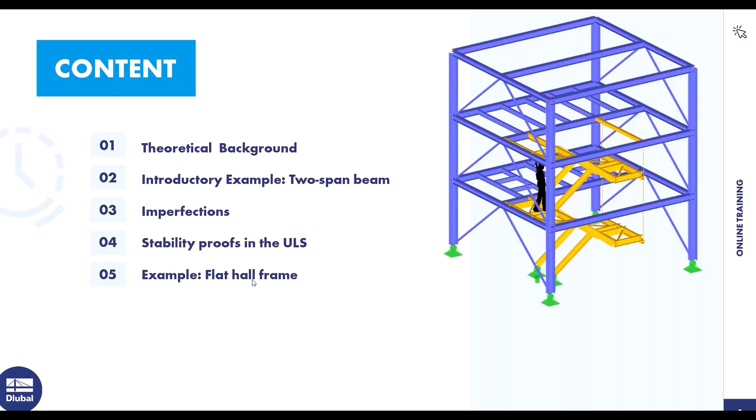That's the content today. At first, I say something about the theoretical background. Then we turn to an introductory example, a two-span beam. Then the next point is imperfections. Then stability proofs in the ultimate limit state. And then we turn to a second example, a flat hall frame.

At first, I say something about the products for the design according to EC3. The most important add-on is the steel design add-on. With that add-on, you can design steel members according to international standards like Eurocode, AISC, and so on. We calculate or design according to Eurocode today.

Then there's the add-on torsional warping. With that add-on, you can consider the 7th degree of freedom and the torsional warping. Then steel joints - with that add-on, you can analyze steel joints based on the finite element method. Then there's the cross-section program, RSECTION.

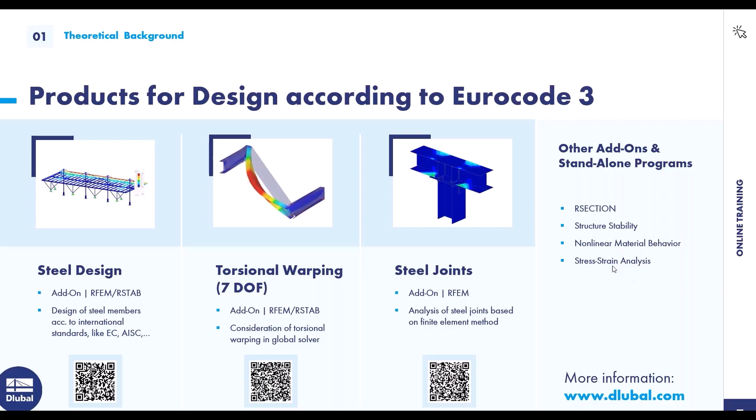Then the add-on structure stability. We use that add-on in the second example. Then there's the add-on nonlinear material behavior. You can, for example, consider a plastic design of steel plates and so on. And then there's the add-on stress strain analysis.

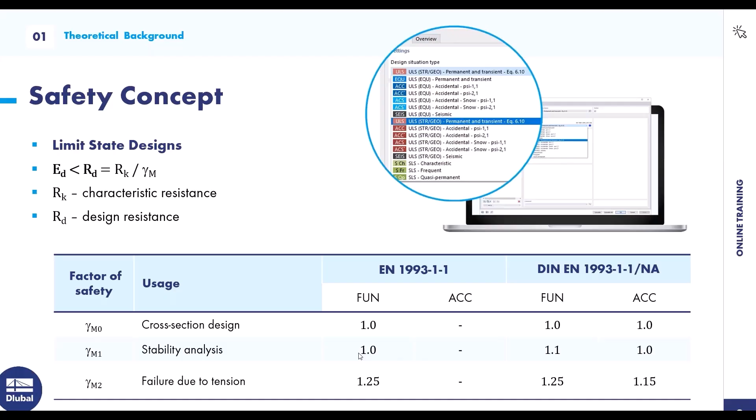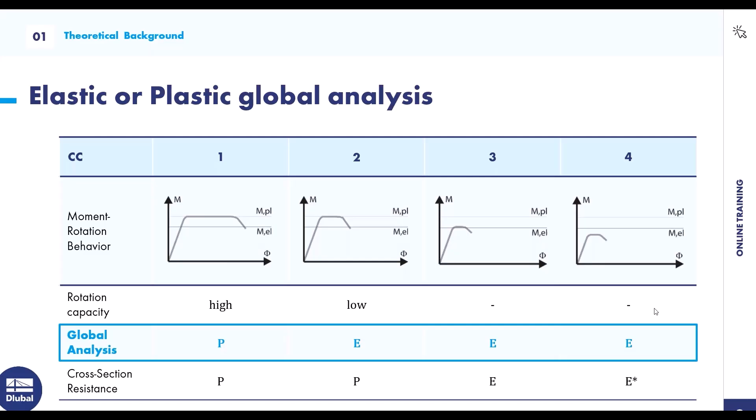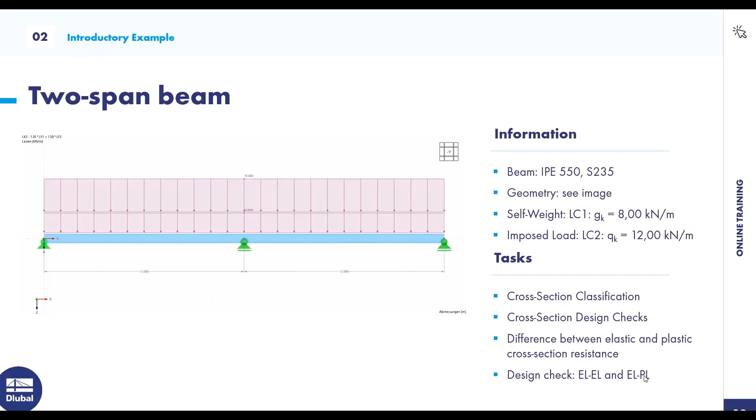Okay, I turn to RFEM. That's the second example, it's already prepared. But for the first example, I model the complete structure. File new.

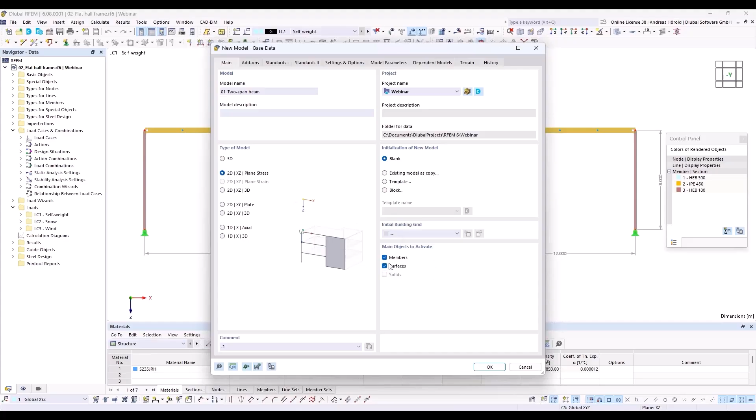So I enter 01_Two-span beam. Type of model 2D is sufficient. We consider only members, but you can also select surfaces, that doesn't matter. And we select the steel design add-on.

Then we need to select the standards. You can see there are, for the load case classification and the steel design, different international standards. We select the Eurocode, and for today we are in Germany, so we select the German National Annex.

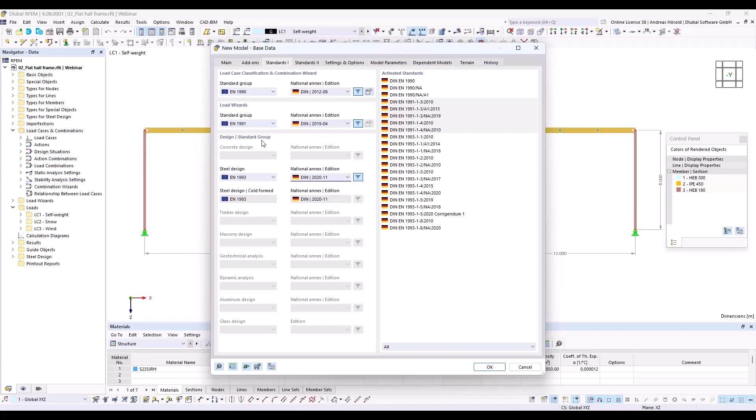We don't use the load wizards, but we use the load case classification and the steel design. We leave the dialog with OK.

So I turn to the view -y, move it a little bit. The grid is 1 meter. I leave that. If you want to change that, you can click on display grid at the bottom, right click, and then edit, and you can change the space for the grid points.

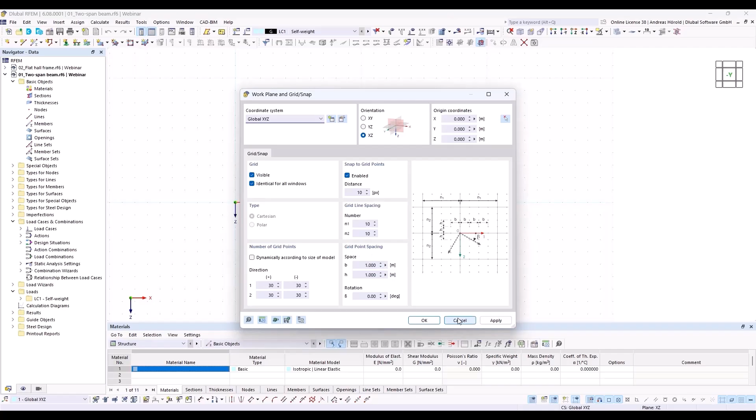So I start with the beam. Here, left above, new single member. I need to define a section. Create new section, I turn to the library.

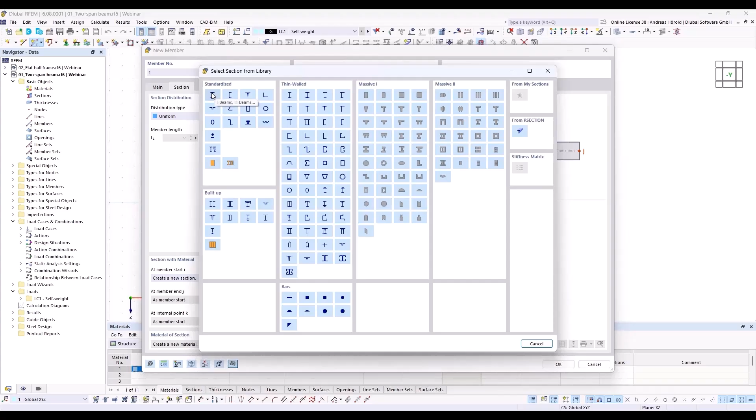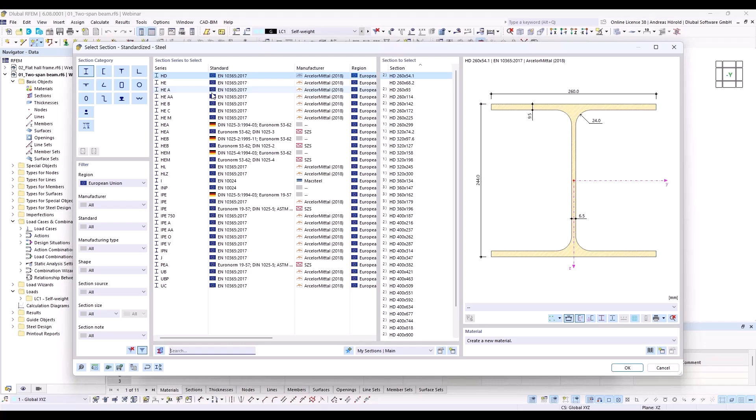Left above, an I-beam. If I am too quick for you, that doesn't matter, there is a recording. When you want to enter the structure by yourself, you can use the recording and the finished models. In the next days you will get an email with the recording, the models, and the PowerPoint slides. Just take a look at what I show.

That's sufficient. Okay, I select IPE 550, and right at the bottom I open the material library.

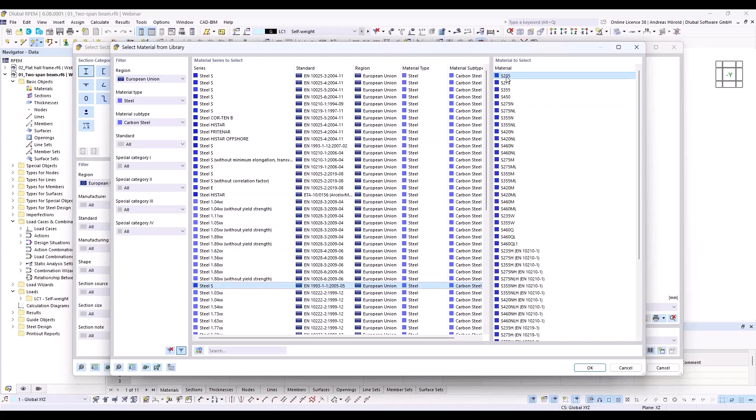I select European Union, steel, carbon steel. There are a lot of steel materials. I use the steel material S235. Okay, you can see now the color is blue, that's okay.

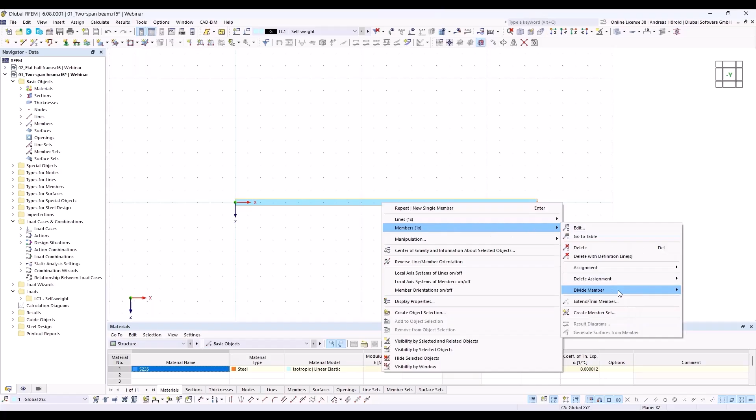So I create a member with a length of 24 meters and I divide the member in the middle with right click, members, divide member and intermediate nodes. One intermediate node, and I create that node without dividing the member. I select this option here, create member nodes without dividing member. Okay, there's the node.

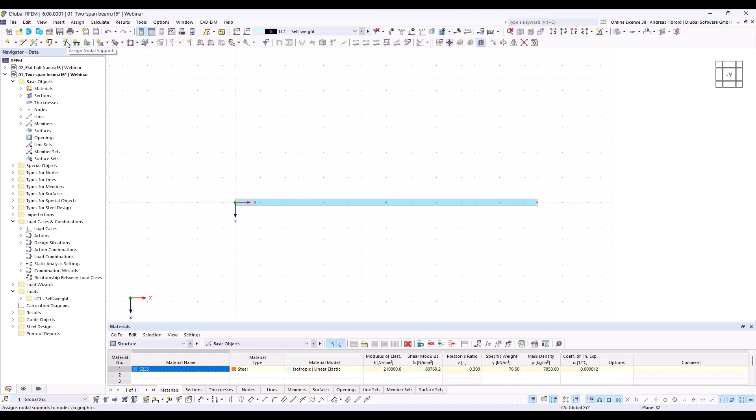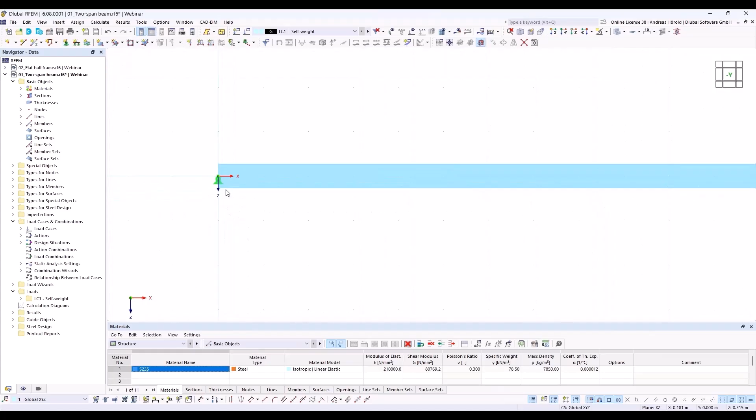So then I create the supports. Here left above, assign nodal support. I press the edit button to take a look if all is okay. Yes, we support in X direction and in Z direction. Okay, and this node is quite a little bit small. With a right click, I can increase the size of the support. Okay, that's enough.

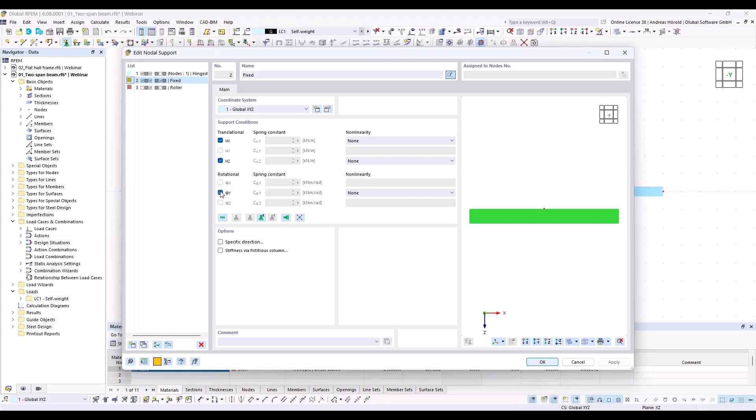So next support, I select the second support and press the edit button. We don't want to fix the rotation for the support, and we deselect the fixing in X direction. We only want to support the member in Z direction. Okay.

So that's all for the model. I create the loads. There's a self-weight load case. I select the edit active load case. The self-weight load case is automatically created for every model, and you can see also the self-weight of the structure is activated. That's correct in our case.

So, above, this button, new member load. And our load should be a force, uniform. You can see there are different options. And the load direction should be in Z direction, in this direction. So the load magnitude should be 8 kilonewton per meter.

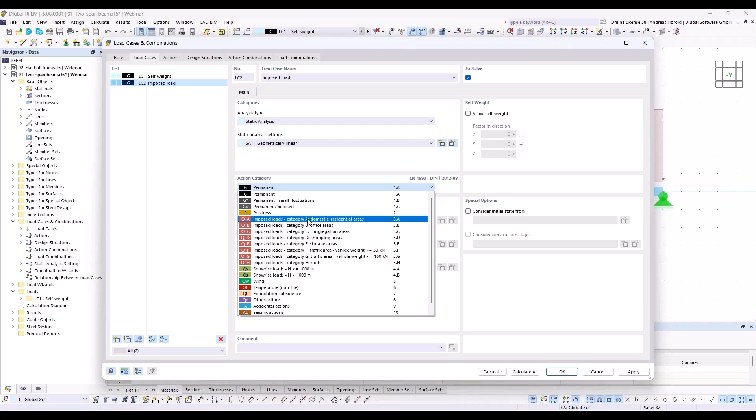Okay, then I create a new load case with that button. I call it imposed load. And I select the action category, not permanent, but imposed loads.

Then I have to create the load for this load case, new member load, and this time 12 kilonewton per meter. Okay, that's all for the model and for the loads.

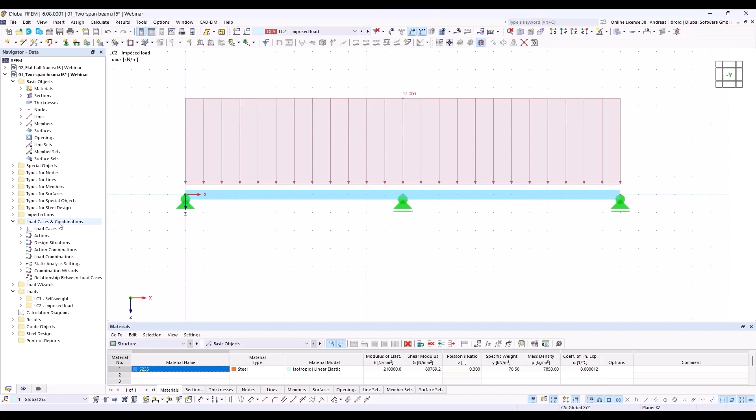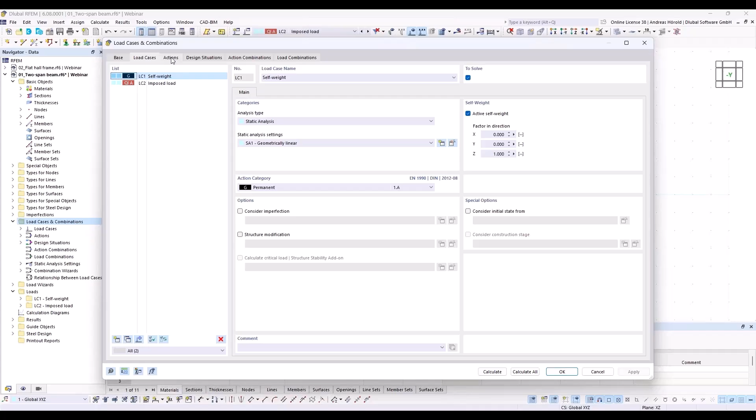I open the load cases and combinations dialog again, this time over the navigator data with a right click. Load cases and combinations, there are the base data. Now, at the beginning, we selected the standard group Eurocode and the German National Annex, and we activated the combination wizard. Those are my two load cases. We've got only two actions.

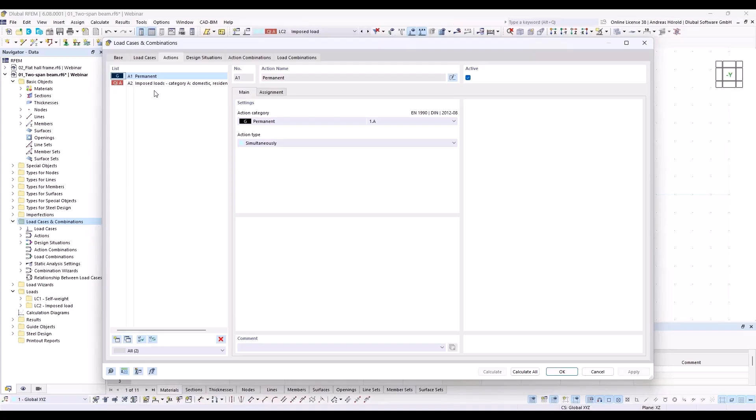Now that's quite important when you have, for example, 4 wind load cases - then there's only one action for the wind load cases. And you can combine in the load combinations either wind in -x or wind in +x and so on.

So then there are the design situations. We would like to design only according to ultimate limit state. That's why I delete the design situations for the serviceability limit state. And what's important, we need to activate the steel design.

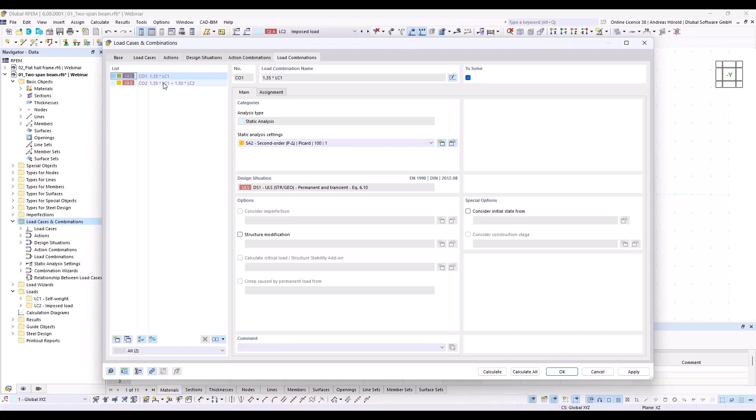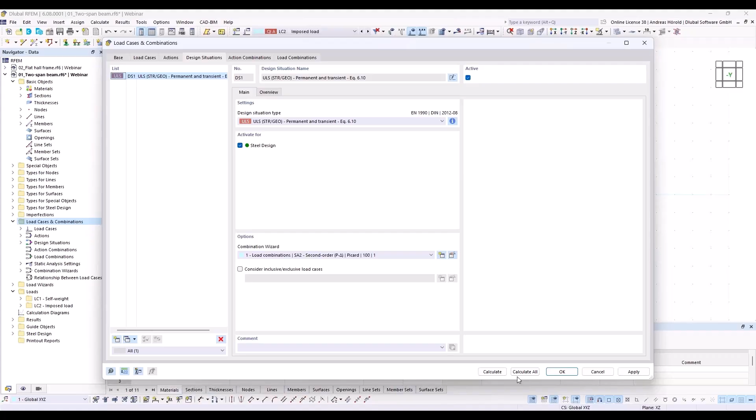So, there are only 2 load combinations. And if I turn back to the design situations and to the overview, these 2 load combinations are assigned for the design situation, ultimate limit state design. So then we can calculate also the steel design.

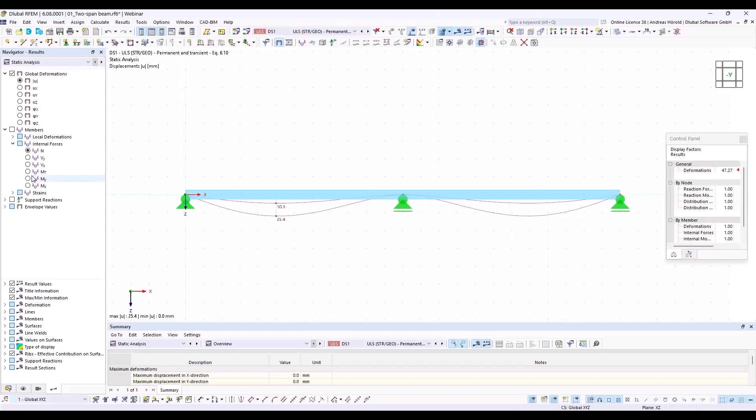At first, we take a look at the internal forces and the navigator results on the left side. The VZ, for example, I can also select only the maximum values, not minimum and maximum. So VZ and MY.

So, and then we can go to the table at the bottom and to the steel design. An error is displayed after the calculation. This is because we haven't made any steel design settings yet. We are only interested in the cross-section verification here.

Therefore, we change to the table design ratios and members. So there's the section proof for shear and for bending. And you can see a plastic design was done by the program.

So if I select the line and press this button, design check details, this dialog is opened. A detailed presentation of the proofs is now possible. You can see the equations and where you can find it in the standard.

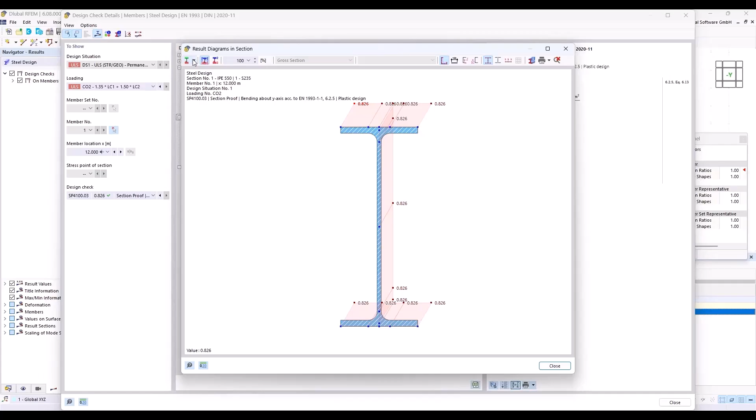So we can also take a look at the result diagram, the design ratio, the stresses. That's the stress in the middle, or over the middle support, and there's tension at the top and compression at the bottom of the cross section. So yeah, okay, that's all.

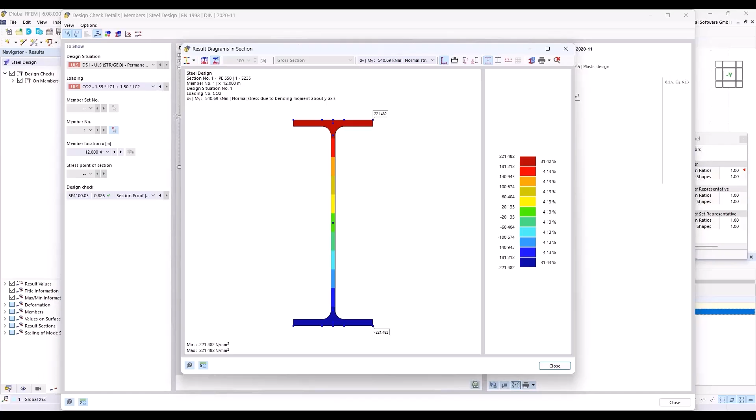Can I show also maybe the cross section information, the stress points, the different sub panels for the cross section classification, the C to T parts. Okay,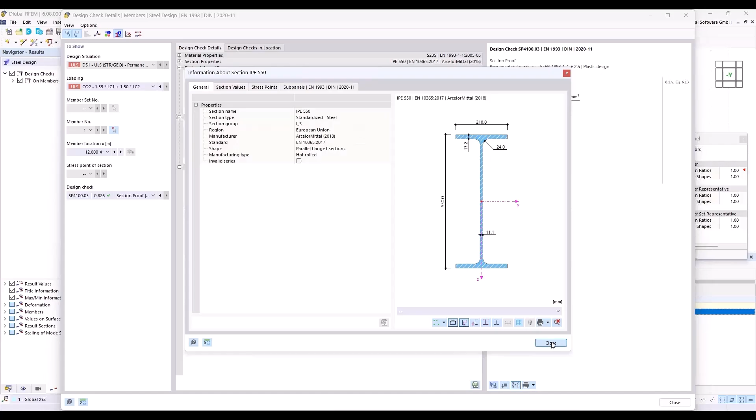That's all. Yeah, and the same, you can also, if you want to check the proof for the shear, you can either press that button or double click on the line, and you can see the equations from the standard.

Okay, now we don't want to do a plastic, but an elastic design. How to do that? I turn left at the bottom to the navigator data. Then I open the steel design folder and the ultimate configurations. And I double click on it.

Yeah, and then I can, for example, uncheck the stability design. Then this error message doesn't appear, but doesn't matter. I select that button here: elastic design also for class 1 and class 2 sections.

It's allowed to do a plastic design for class 1 and 2, but in this case, we would like to do an elastic design also for the cross-section class 1. In our case, the cross-section is cross-section class 1.

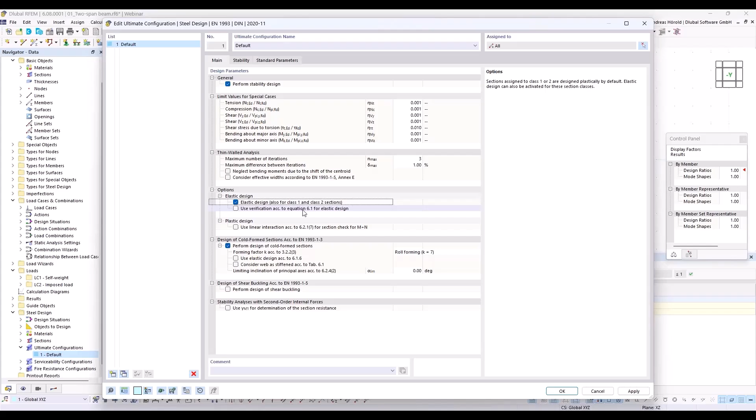Okay, we calculate or rerun the steel design again. And I select design ratios and members. I remember we had a design ratio for the plastic design of 83%, and now we have got 94%, because we do an elastic design. And if I double click on it, I can see the equation.

Okay, what you can hold in your mind is that we can do every time an elastic design. We can consider the elastic cross-section resistance. That's what we did in the second step, in that step here.

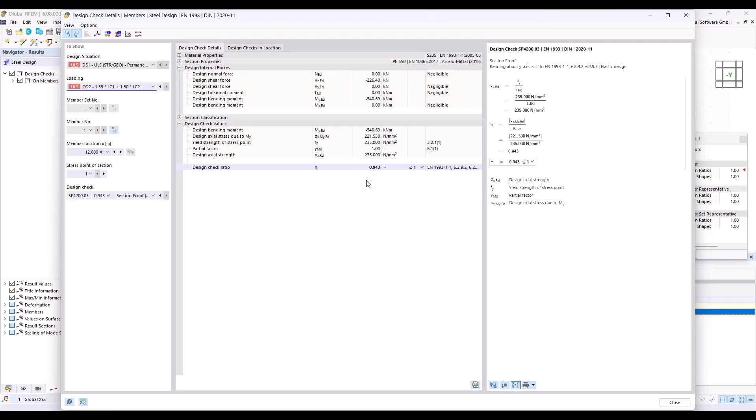So we have now learned how to carry out a cross-section check and how to take the elastic and plastic design into account. At first the plastic design, in the second step the elastic design, because elastic design is allowed for all cross sections. And in addition, we now know how to display the design formulas and compare them with our own manual calculation.

Then we turn to the next topic for today: effects of deformed geometry of the structure. In the first training course, Introduction to Member Design, it was learned how the results can differ between the calculation according to the first order theory, the geometrical linear analysis, and the second order theory.

The geometrical linear analysis is an equilibrium formation on the undeformed system, and the second order analysis is an equilibrium formation on the deformed system.

In this example of the cantilever column, this effect can be seen very well on the basis of a slender and a compact cross-section. In the case of the slender column, the increase in the bending moment at the foot point is much larger than in the case of the compact column, if one calculates according to the second order theory. And there's no difference when you apply the geometrical linear analysis.

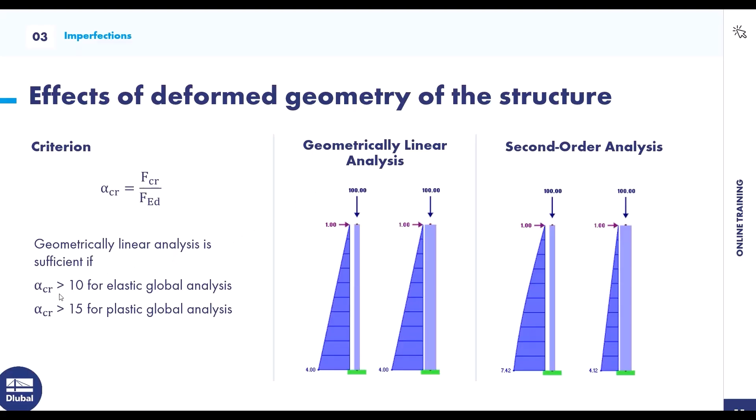So the next point is the equivalent geometric imperfections. Imperfections are closely related to this topic. In Eurocode 3, these are generally grouped together as equivalent geometric imperfections. What are imperfections anyway? They are production-related deviations in the model geometry and/or material properties. There can be real misalignments in classic hall constructions or tolerances in production, especially when rolled sections are used, and these can be summarized as equivalent geometric imperfections. On the left side of the graphic, you can see the initial sway, the global imperfection applied to the structure. If individual components are examined more closely, there's the local equivalent imperfection, for example an initial bow imperfection. This depends on the selected profile, the yield point, the buckling curves, and the proof method. These are two variants of the equivalent geometric imperfections.

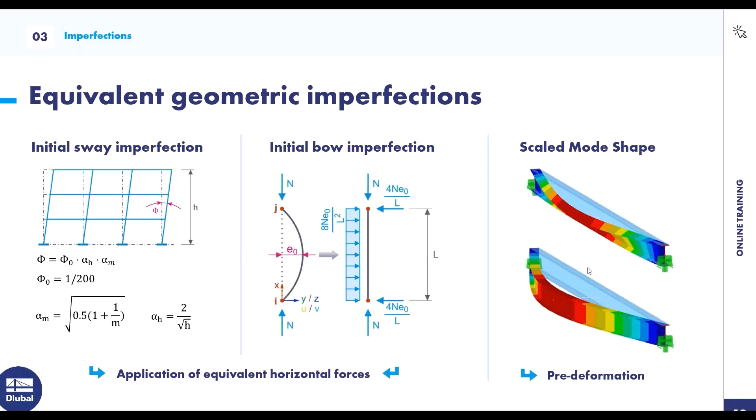Another alternative is pre-deformation, which can be calculated with the help of stability analysis. The respective governing eigenmode is scaled and applied as an imperfection. That's not so often used, but it's possible. What's often used is the initial sway imperfection or the initial bow imperfection, or both. You can see that in a later slide.

When designing steel in RFEM, 3 different stability analyses are carried out. On the left side, there's the classic flexural buckling as a lateral deflection. In the middle, you can see torsional buckling in pure torsion. On the right side, lateral torsional buckling as a combination of the two previous proofs.

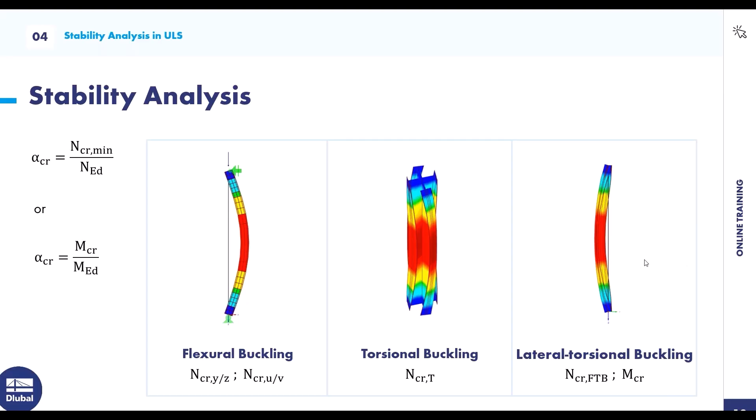Methods for stability analysis: there are 3 methods. Method A: you have to apply a global and local imperfection, and the structure analysis should be done with second order analysis. Then you can do the cross-section design checks with the internal forces. Method B: global imperfection, meaning only this initial sway imperfection, then the structure analysis according to second order analysis.

And what's quite important, you have to consider the buckling length by the member length, not with a factor—SK is equal to length. Then method C: structure analysis according to geometrical linear analysis on the ideal structure, but in that case with the real buckling length.

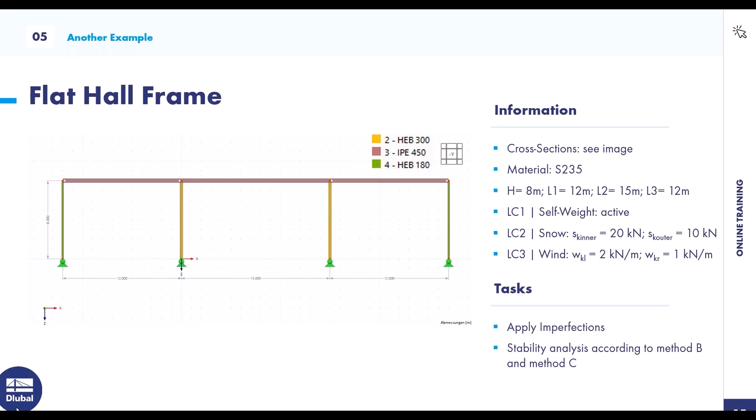Okay, so then I turn to the program, to the predefined example.

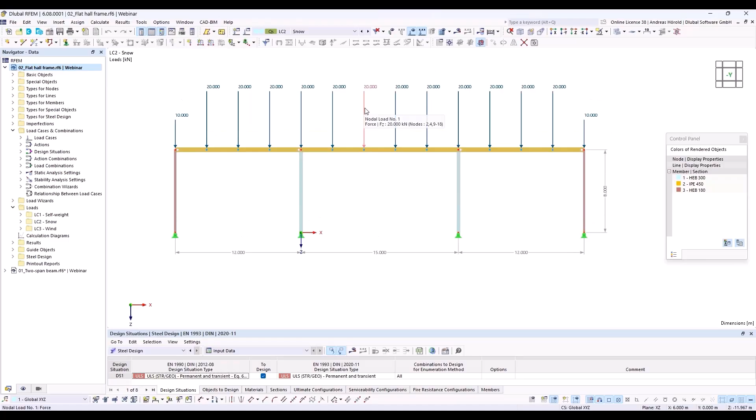So that's the construction self-weight load case, then a snow load case with loads, for example, from purlins, and a wind load case, wind in X direction with wind pressure and wind suction.

Left above, I turn to the base data, a 2D model, and we use the add-ons structure stability, and the steel design add-on. And we select the standards Eurocode and the German National Annex.

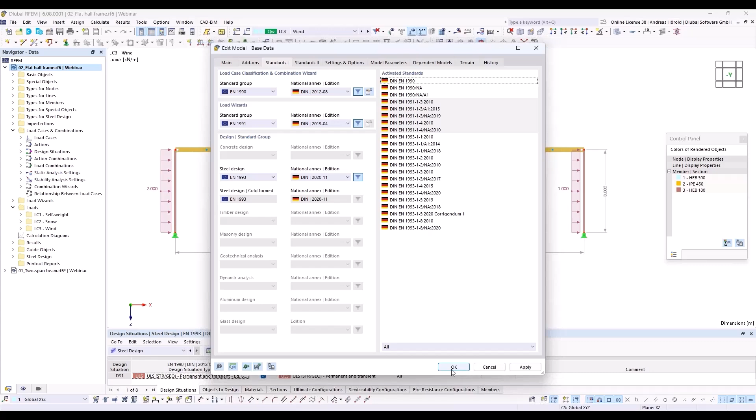Okay, and we use the add-on structure stability to check whether we are allowed to determine the internal forces according to the geometrical linear or second order analysis.

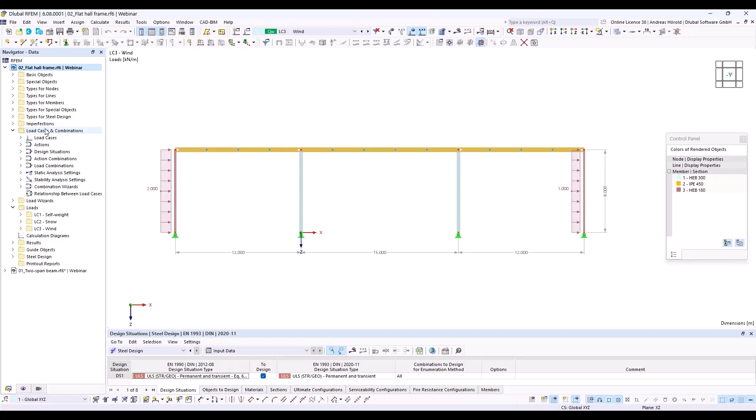That's why we turn to the load cases and combinations, and I go directly to the design situations. I select the geometrical linear analysis, and I edit that, and I activate the stability analysis.

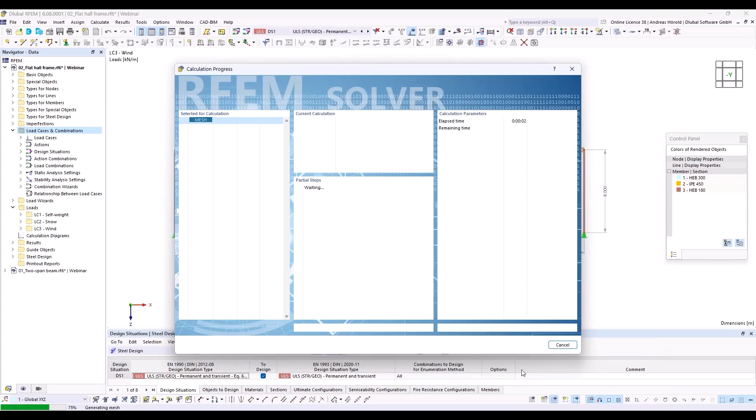Okay, and I run the calculation.

After the calculation, we see the minimum critical load factor, 6.05 for the design situation, and 6 is smaller than 10. We need to do a stability design by using the second order analysis.

For the stability design using the classic equivalent bar method, meaning method C, the internal forces can be calculated according to geometrical linear analysis, and buckling lengths must be assigned to the columns.

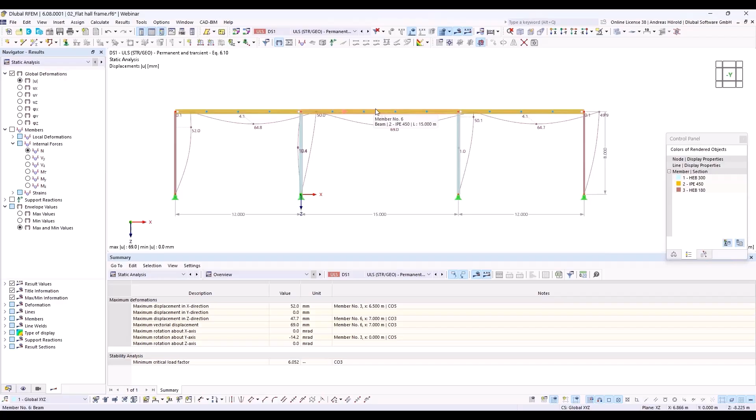But for the design of the lateral torsional buckling, the application of the second order analysis is also required with this method. That's why I switched to the second order analysis. For the columns, we consider the effect twice.

One time with the second order analysis and with the real buckling length. But we need to apply the second order analysis because of the horizontal beam and the lateral torsional buckling.

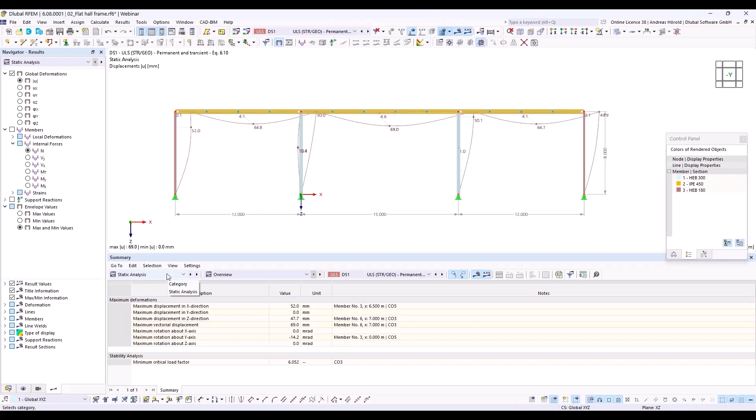So let's take a look first at the buckling length. I turn to the stability analysis, then results by member.

It was combination number 3. So, and then I can see the effective lengths and critical loads by member.

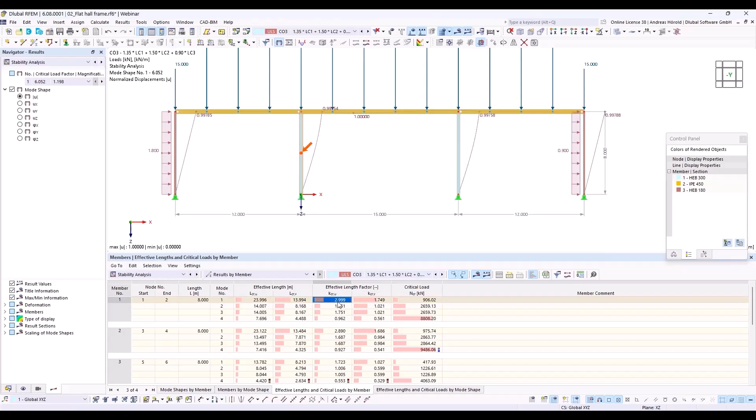This column has an effective length factor of 3. This column, we apply also 3 for this column. And for the left and the right column, 1.72.

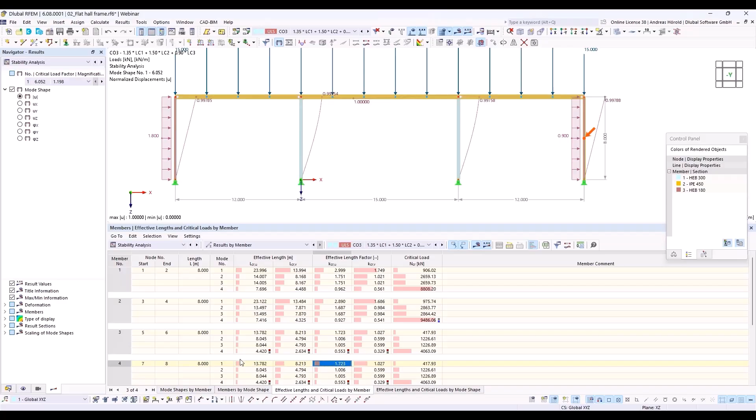So I turn back to the design situation and we run, or we use, the second order analysis. Okay, that's okay.

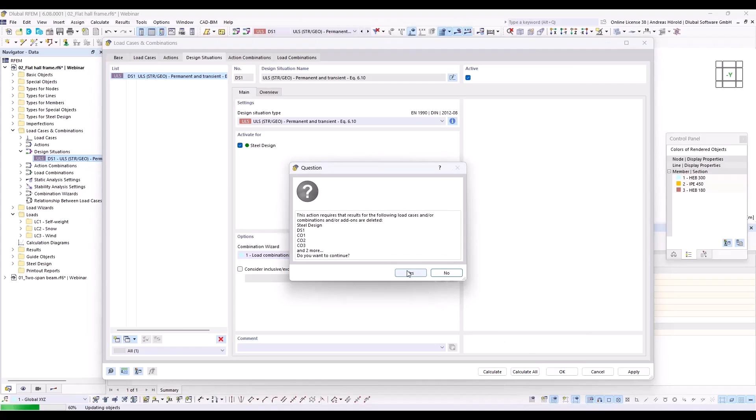So now we define the effective lengths, or we assign them to the columns. I select the inner columns, then I do a right click, members, edit, and I turn to the design configurations.

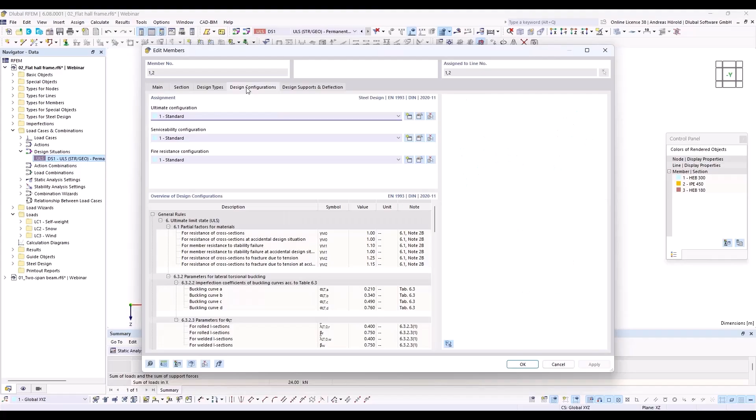And design types, and I define effective lengths. I would like to mention that you can also import the buckling length from the stability analysis. Now we don't do that in this example.

Okay. Then I select the left and the right column. I press the control key, you can see the plus sign. I would like to select both columns. Then right click, members,

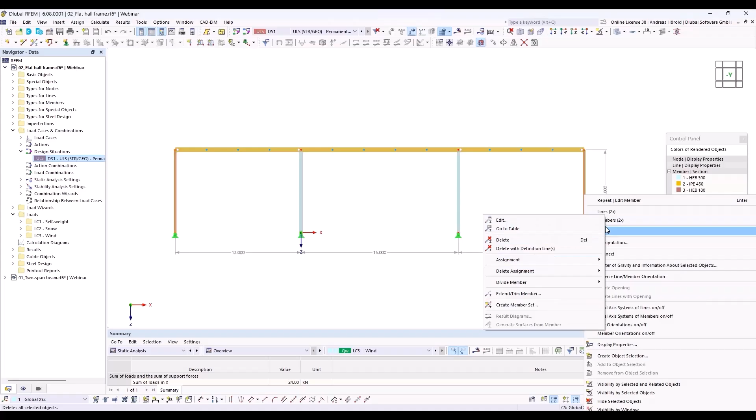edit. The same procedure, design types, effective lengths, and 1.72.

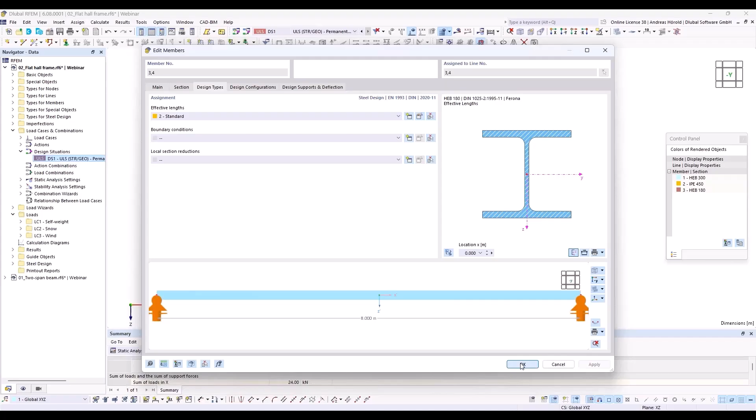And you can display the effective lengths. Then we go to navigator display, then types for steel design, and I select member effective lengths. And you can see the factor 3 and 1.72.

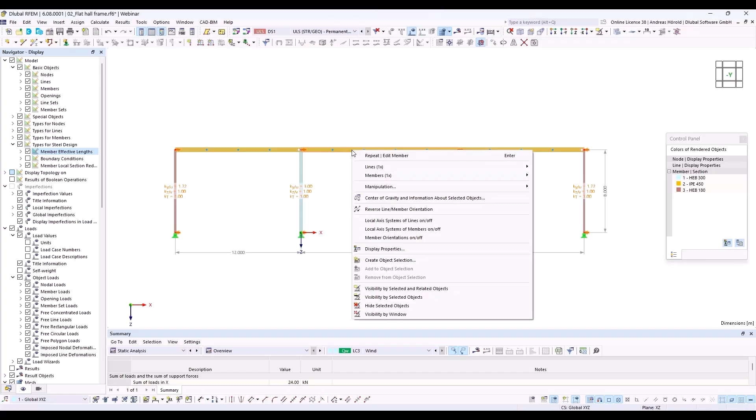So then I select the inner horizontal beam by right click, members, edit, then design types, effective lengths. I create a new effective length.

So this time we would like to consider the horizontal supports, for example by purlins. That's why I press this button here, select member or member set. I select this member, and the program will detect all these nodes here. Okay, you can see that here.

And we would like to fix it in horizontal direction. I would like to consider that the upper flange is supported, since the purlins lay over the horizontal beam. That's why I select all these lines here, and I define eccentricity type at upper flange.

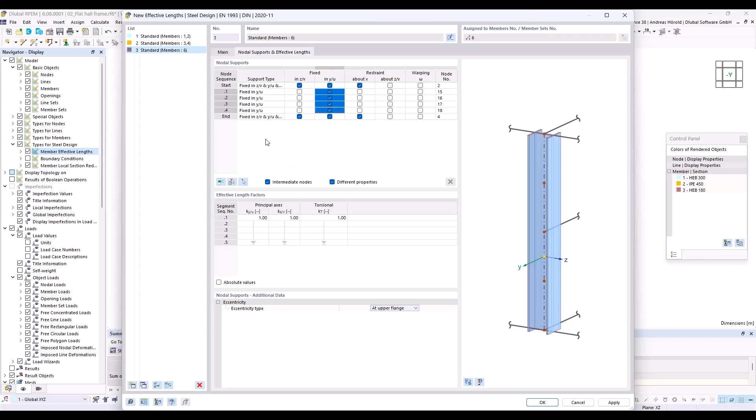Okay, I can leave the dialog and you can see the supports. Fork support at the beginning and at the end. And for the inner nodes, there is only a horizontal support at the upper flange by the purlins. So, okay.

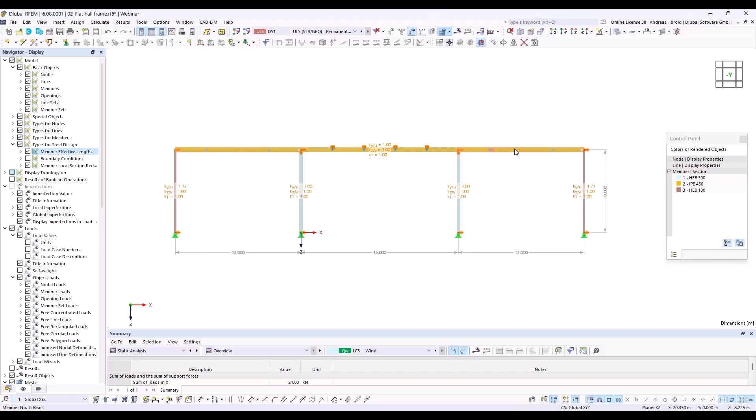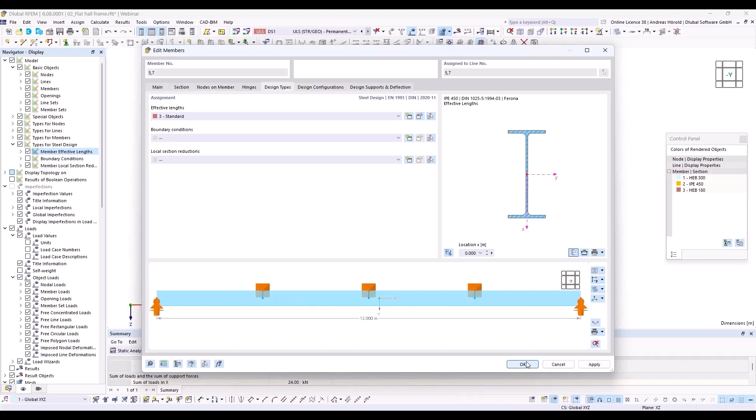Okay, then we can run the calculation. I turn to Steel Design and press this button, Show Results, and the calculation starts. So the calculation is done.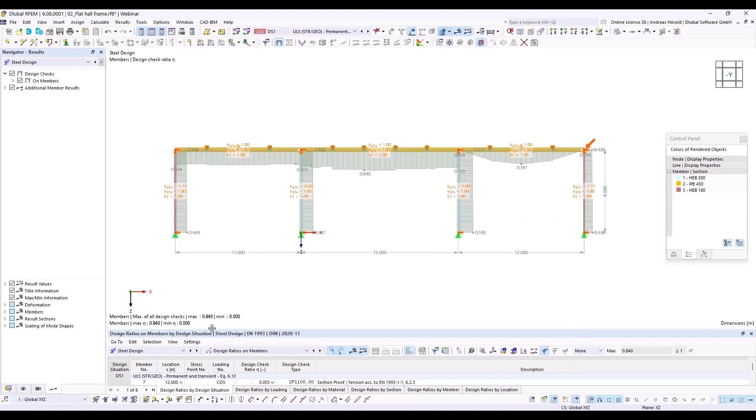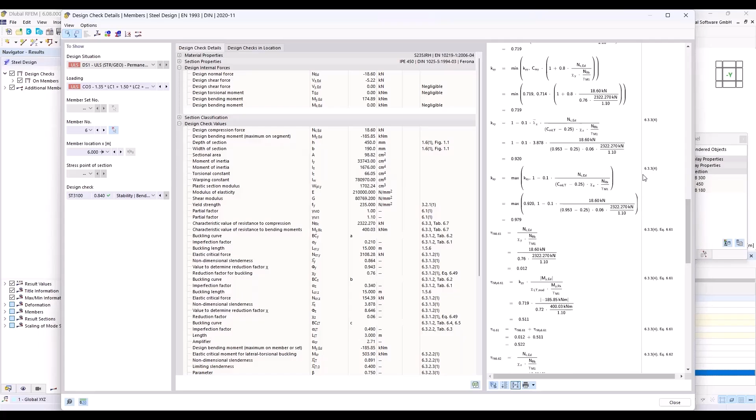We have a maximum design ratio of 84%, stability, bending, and buckling about the principal axis. So I can double click on it and you can see the design checks, the equations, and where you can find it in the standard.

Okay, this was the classic structural component design, method C, without imperfections but with effective member lengths. Now we want to examine the model using the approach of global imperfections and the structural component design method B. I turn back to the PowerPoint.

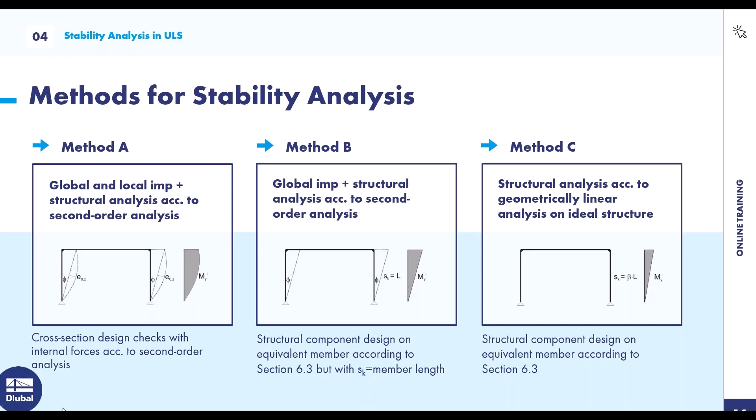We did method C, with the effective member lengths and without imperfections. Now we define imperfections, and I delete the effective member lengths for the columns. We say, or we consider SK equal member length. Okay, I turn back to the program.

At the bottom left, I turn to the navigator data, then types for the steel design, effective length. Let me save that state, save as, without imperfections. Okay, I overwrite it.

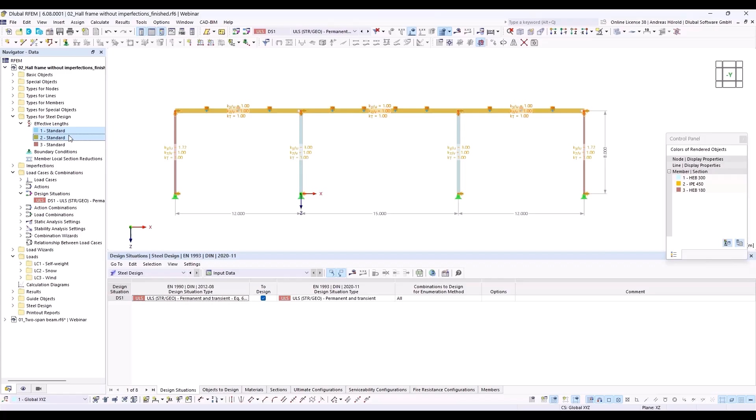So, and now I delete the effective member lengths, or the buckling lengths, for the columns. Delete. Okay.

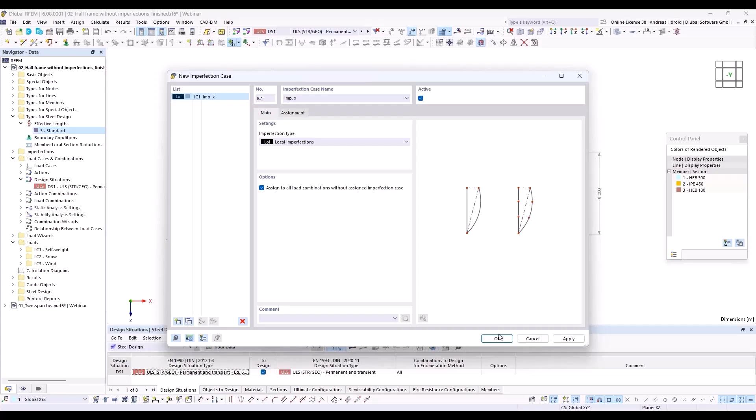And in the second step, I need to define imperfections. So above here, that button, new member imperfection. I have to create an imperfection case in the first step, imp X. We have got imperfections and imperfection cases. You can consider more imperfections in one case, that's why we have imperfection cases and imperfections. That's the case, okay. And now we create the imperfection for that imperfection case.

We define an initial sway, type Eurocode 3. The imperfection direction is Z, the strong axis. Then the basic value is 200. I can measure the structure height, eight meters. Number of columns in one row, those are 4. Yeah, and the reduction factors are calculated automatically.

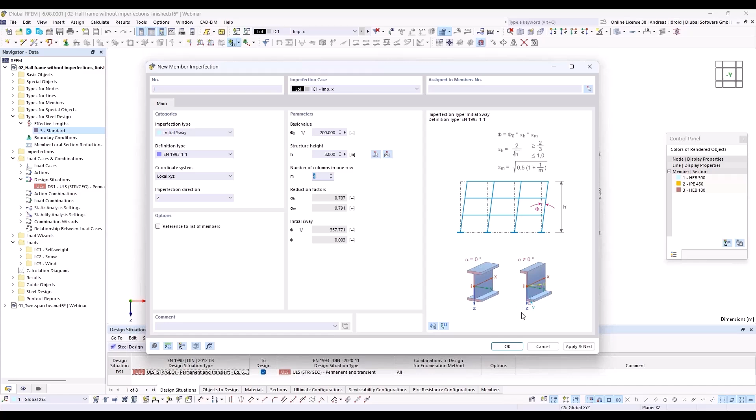Okay, and I need to assign it to all 4 columns. And to display it, I have to press this button above, Show Imperfections. So, and now we can run the calculation.

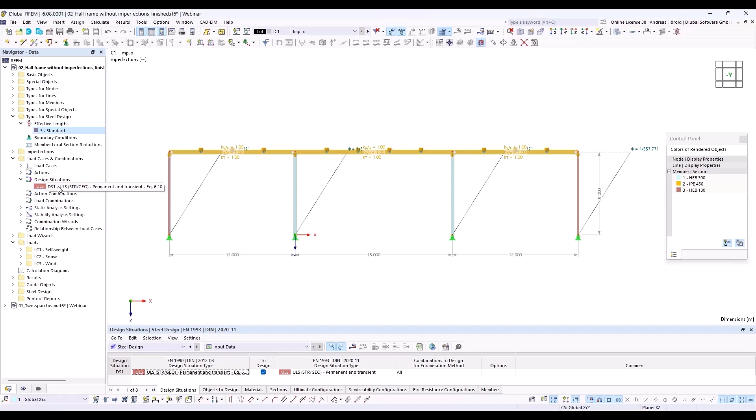Or before I do that, I take a look at the design situation, your second order analysis. And it must be checked that the program considers the imperfection cases. Okay, now we can calculate all.

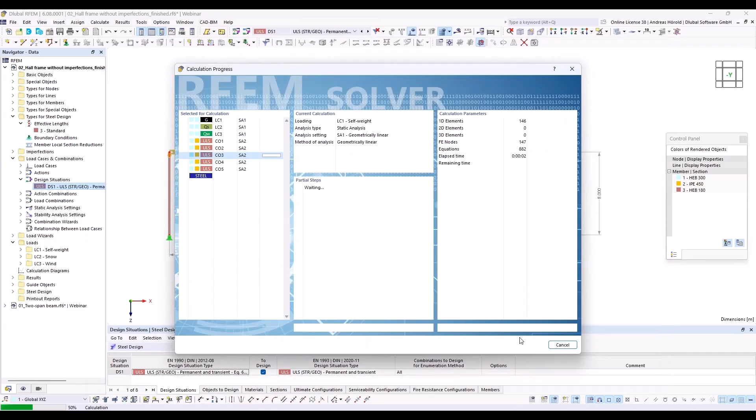So we go directly to the steel design, design ratios on members. Yeah, and you can see the design ratios. With method C, we had a design ratio of 84%. Now we've got 86%. That's quite similar, different methods.

Okay, yeah, that should be all for today. You learned in the second example how you can apply method C in the first step, and then with imperfections with method B in the second step.